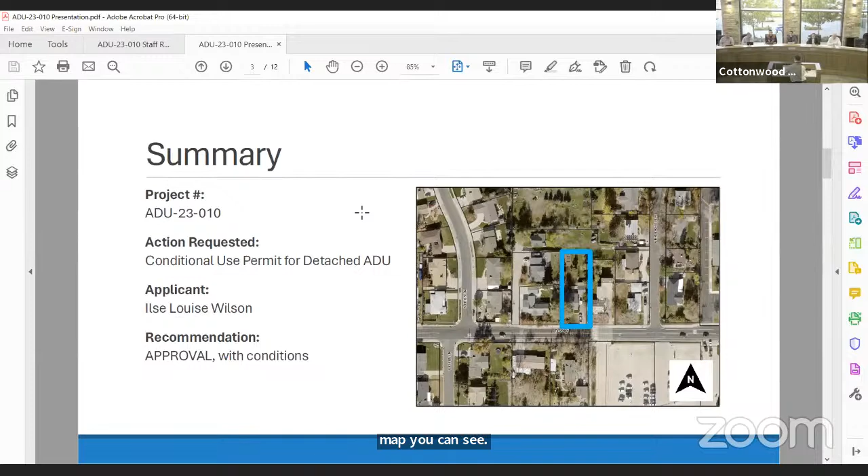The property owner is Ilse Wilson. She's in the audience today. It's an R-1-8 single family zone, so detached ADUs are again a conditional use in this zone. The acreage of the property is pretty large for the zone, it's 0.30 acres, so almost a third of an acre. On the map, you can see there that it's a pretty long parcel. It extends pretty deep from the road.

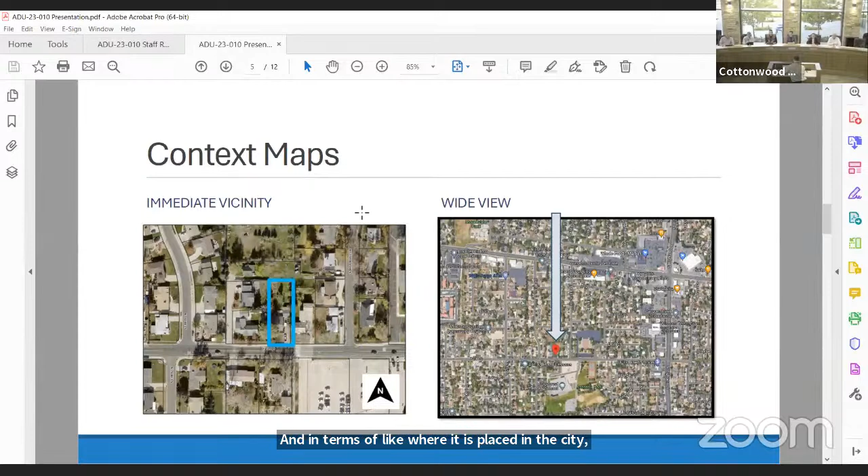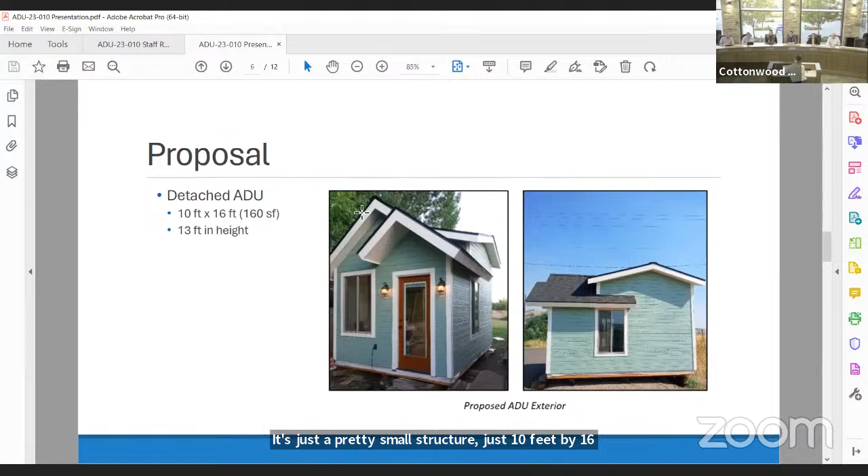So again, the proposal is a detached ADU. It's just a pretty small structure, just 10 feet by 16 feet, 160 square feet. And it would be 13 feet in height, which is much lower than the limit. The location that the applicant is proposing is in the rear yard, which is the requirement. The setbacks for detached ADUs are the same as primary dwellings in their zone.

The applicant shows on the site plan here, I'm not sure if you can see it, the text is kind of small, but the applicant shows that the ADU would be located 20 feet from the rear property line and 8 feet from the side property line on the closest side. So that meets the requirement there. And it's kind of covered by a tree in the satellite picture here, but the applicant has 2 parking spaces in the front driveway that they intend to use for the 2 parking space requirement for detached ADUs. So they've met that requirement as well.

We didn't receive any public comments by noon today, and I haven't seen any email or anything. I'm not sure if anyone's in the audience to speak to the project, but we don't have anything.

And then I just had a few findings that I wanted to copy over from the staff report. I won't go through all of them in depth, but we found it to be compliant with chapter 19.75 accessory dwelling units, our zoning ordinance that addresses ADUs, and 19.84 conditional uses. And they'd be required to continually meet those provisions with this permit.

We're holding the public hearing. We've given public notice 10 days in advance, and the property owner has landscaping and fencing to mitigate the visual impact of the parking areas and the ADU entrances to adjoining property owners.

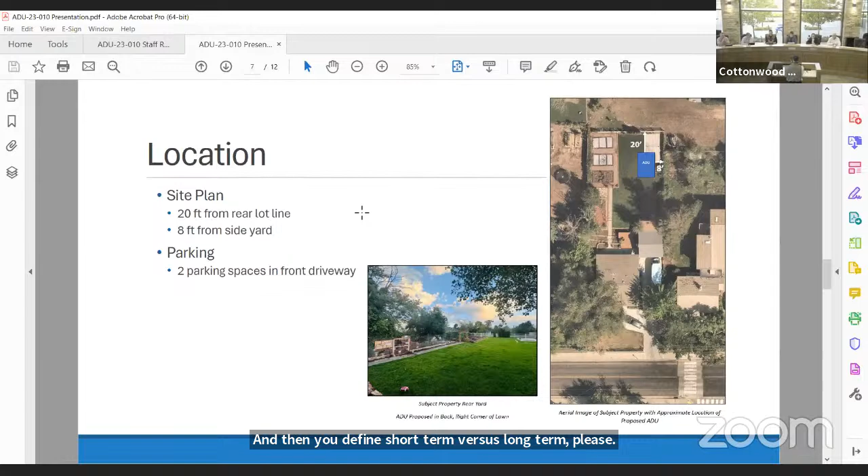Other questions? Okay, thank you. Thank you.

Does the applicant have any desire to share anything with the commission?

Okay, time for deliberation. What are your thoughts?

Excuse me, let's open this for public comment. Thank you for that. Do you have anyone that's here to make a public comment on item 3.2?

Please, if you can tell us your name, you'll have 3 minutes. My name is Catherine Burns. My husband is Kendall Brady, who's the owner of record of the property right behind her house. And she's been in conversation with him and we have no problem with this going forward. I just wanted to make that note. Thank you very much, that is extremely helpful.

Am I allowed to ask questions too? No, but you can state a question. We may not choose to answer it.

Yeah, I'm Kevin Chappie, I live just to the west of the property there. And so a couple things that, I guess I don't know the ordinances and the zoning, but it seems if you're in a single family zoned area that you could create a rental space that someone else has to potentially police to see if they're doing it properly. I don't know, that doesn't make sense to me, really. And that sort of puts it on somebody else that shouldn't be bothered with that, really, in terms of whether it's short term, long term, or whatever.

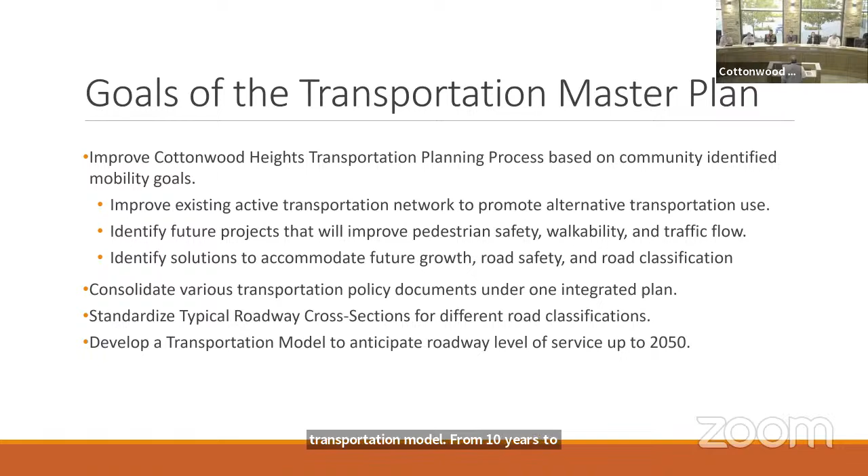We're going to go through three of the results of this master plan: first, the roadway cross sections; second, the recommended pedestrian improvements; and third, the recommended roadway improvements.

For the cross sections, there are four different groups in the city: local roads, urban collectors, urban arterials, and urban core arterials. What this master plan set out to do was standardize the cross section for each of those classifications.

What is in a cross section? You have all of the road width, you have your sidewalk, park strip, curb and gutter, and bike lanes or pedestrian facilities. Just a quick rundown, you have the local road width of 56 feet.

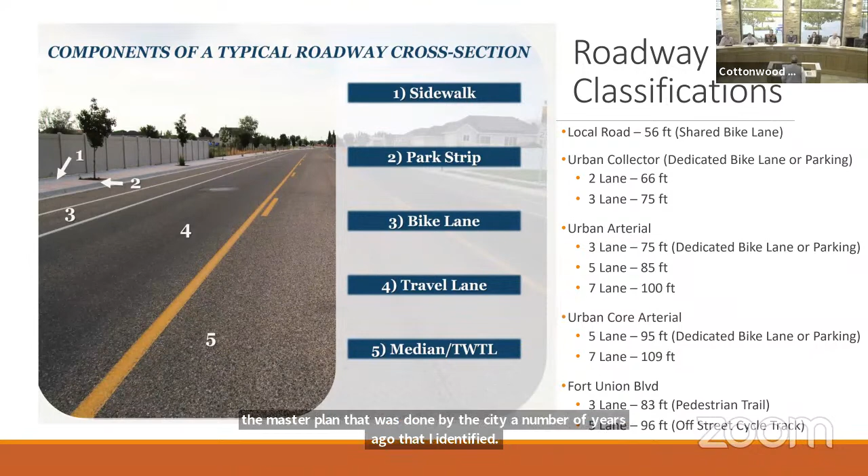One thing to note is that Fort Union Boulevard had its own designated cross section, and that was a result of the master plan done by the city a number of years ago that identified specific facilities on Fort Union Boulevard. This is the map of the existing roadway network, and you can see Fort Union Boulevard identified in green as an urban core arterial.

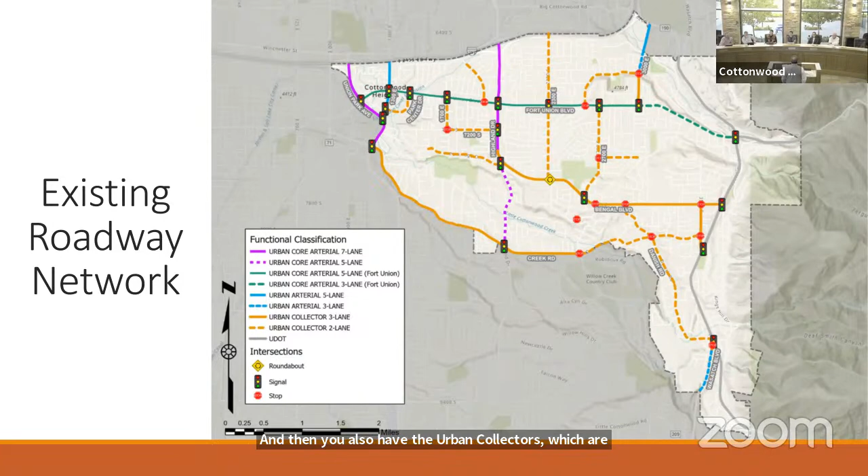You also have the urban collectors, identified in orange, which are typically 2300 East, 2700 East, Creek Road, and for urban arterials, you have 1300 East and 30th East.

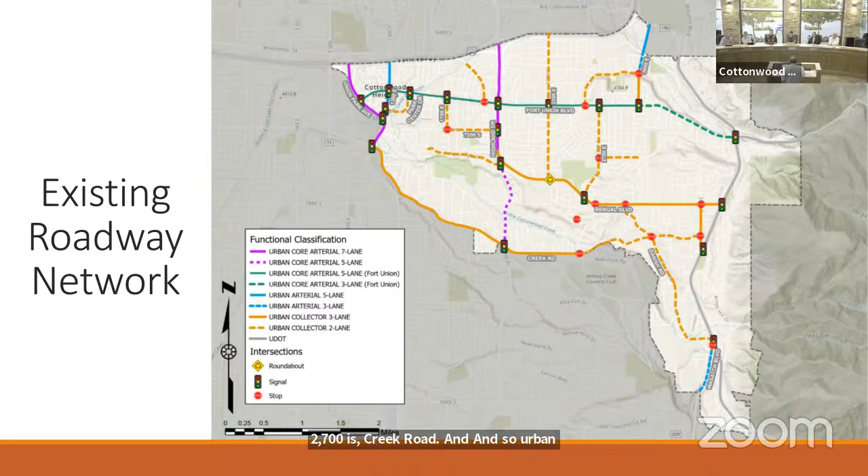We'll just quickly look through these. These are the cross sections shown on the master plan. One thing to note is that we made every attempt to include pedestrian facilities in these cross sections.

This is the urban collector cross section. It's 2-lane and 3-lane. The 2-lane urban collector is a 66-foot cross section, and the three-lane urban collector is a 75-foot cross-section. One of them is shown with parking, and the other is shown with a bike lane.

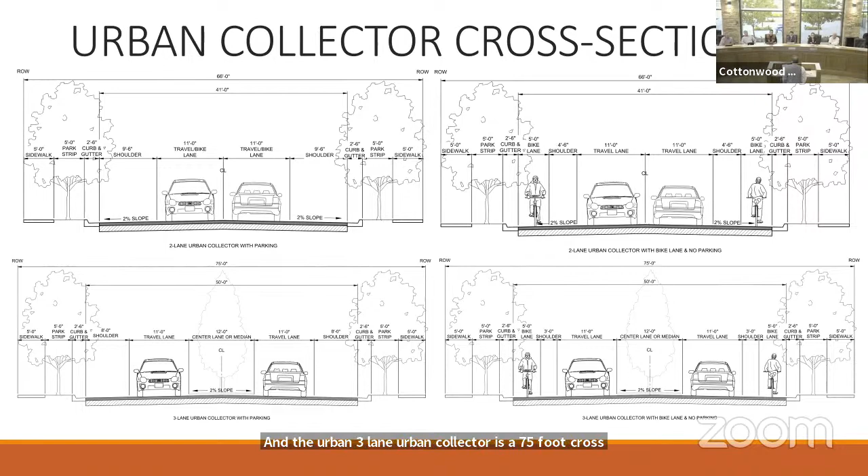Three-lane urban arterial has a cross-section of also 75 feet, and it also shows either a bike lane or an 8-foot shoulder along with the travel lanes.

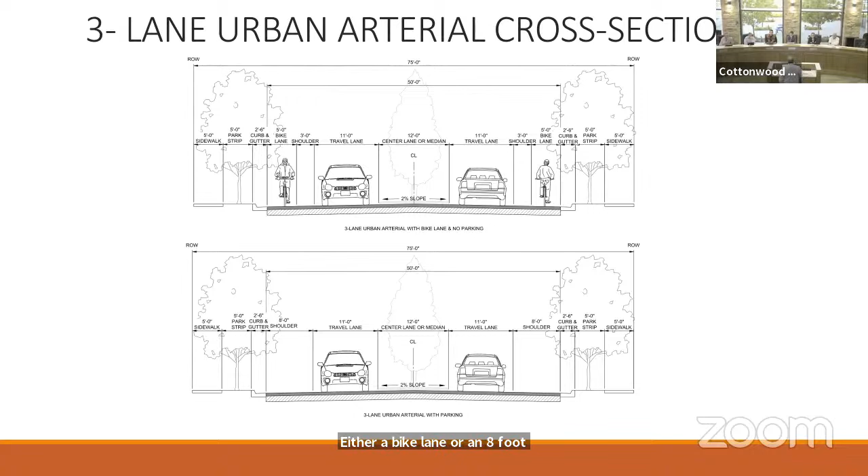And finally, you have Fort Union Boulevard, which is showing a 3-lane urban core arterial and a 5-lane urban core arterial. On the 3-lane urban arterial, it's showing a 20-foot section for a future pedestrian trail, located between Wasatch Boulevard and 30th East. The urban core arterial 5-lane is west of 30th East all the way down to 1300 East.

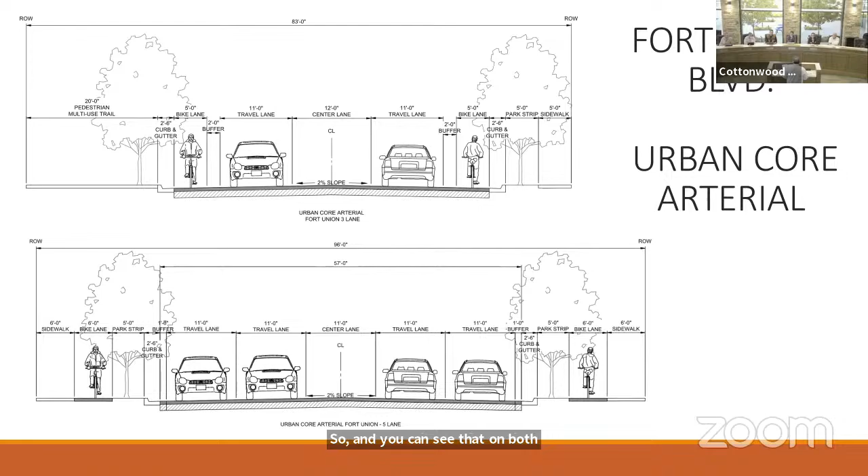It's showing what's called a cycle track, where you have a grade separated bike path and a sidewalk that's separated from the roadway. You can see that on both sides of the road, a 6-foot bike lane and a 6-foot sidewalk on Fort Union Boulevard. The second part of this presentation is regarding the active transportation facilities.

There are 3 types of active transportation facilities identified in the various engineering manuals. Level 1 is a facility that is grade separated from the roadway, so it has a physical barrier that separates the trail or pedestrian facility from the roadway. So you have a curb and gutter, something moving the facility off the road with a physical barrier.

That would be a cycle track or pedestrian trail. A level 2 is a facility that's located on the roadway, but is designated for pedestrian facilities exclusively. That would be a buffered bike lane. And level 3 is a facility that's shared between bicyclists and vehicles, and that would be a shared bike lane.

The first thing you're looking at here is the existing active transportation backbone in Cottonwood Heights. You can see there's buffered bike lanes on Bengal Boulevard. You can see the big Cottonwood Canyon Trail identified in orange. And there are a number of shared roadways and buffered bike lanes. So this is what's existing currently in the city.

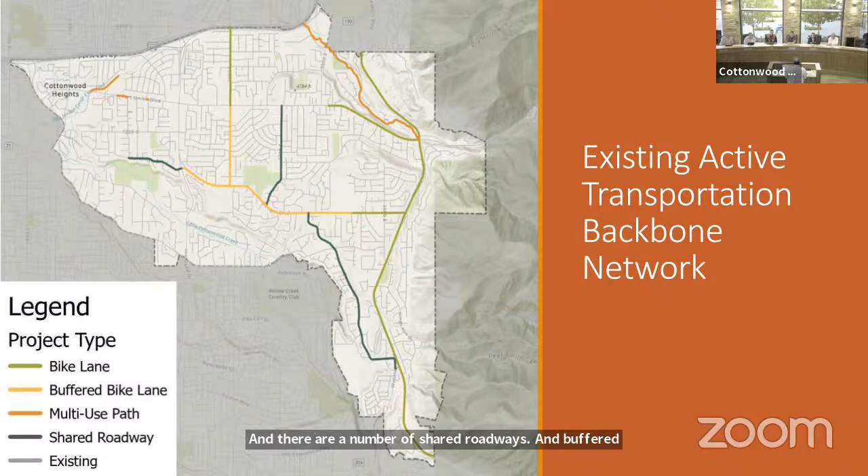So the third part is the model that was used to develop this Transportation Master Plan. This model is based off of Wasatch Front Regional Council's TAZ model, which is a model developed for the entire Salt Lake County region. It includes the employment and residential populations for different areas.

What this model is, it's a high-level model. This is not a site-specific model. It's not detailed, like it doesn't model each car, which would be called a synchro model. This is more based off of daily volume, daily traffic. The Synchro or VISSIM model is not included in this study. So this is more of a 10,000-foot analysis of the entire city.

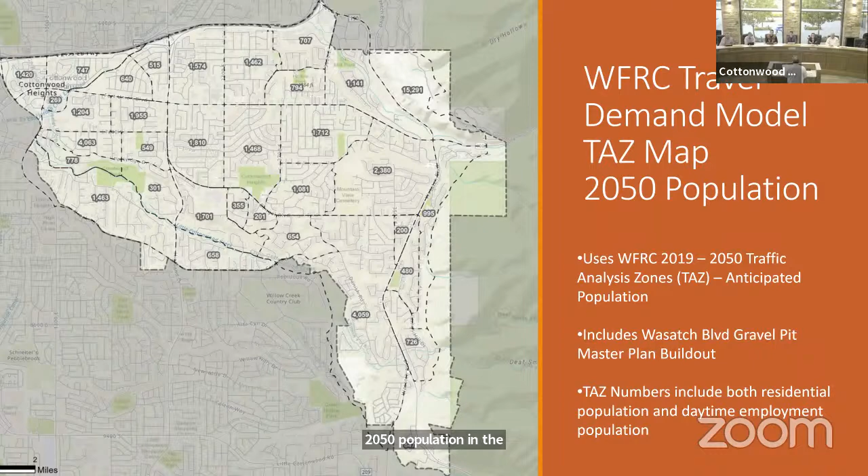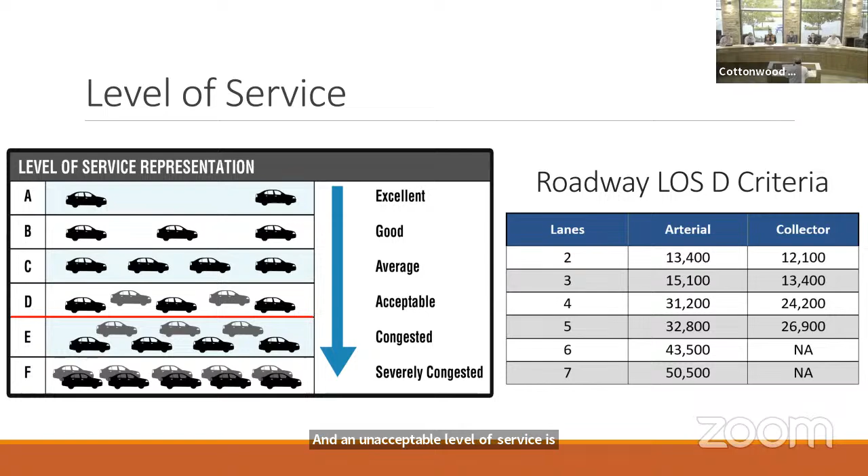So level of service, this model and its recommendations are based off of a level of service where when you get below a D, you're reaching the threshold of unacceptable. On the right, you can see the volume they use to establish that level of service of D, which comes from AASHTO, the engineering publication. A level of service measures the delay on the road based off of the total number of cars in a day, and an unacceptable level of service is typically below a D, so an E or an F is where you start seeing the congestion.

The original plan in 2019 did not include the gravel pit, but they did include the gravel pit in this one.

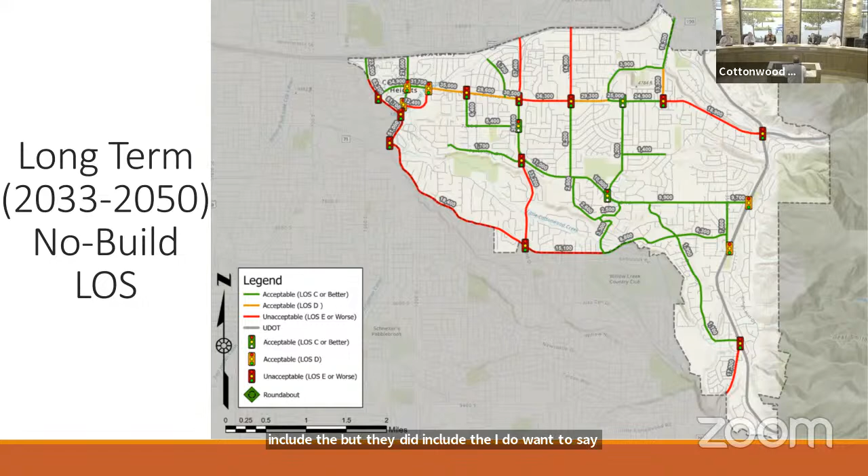I do want to say, if you look at the recommendations for the roadway, what they found was, going back to the impact fee analysis, that future development in the city did not have a large enough impact to warrant an impact fee. The percentage was very low. Typically, when you see impact fees, it's because you have to build a road for a new development.

Cottonwood Heights being a built-out city didn't see that type of pressure being put on the roadway. I guess most of the pressure is coming from the existing population, and also the regional traffic that comes through our city.

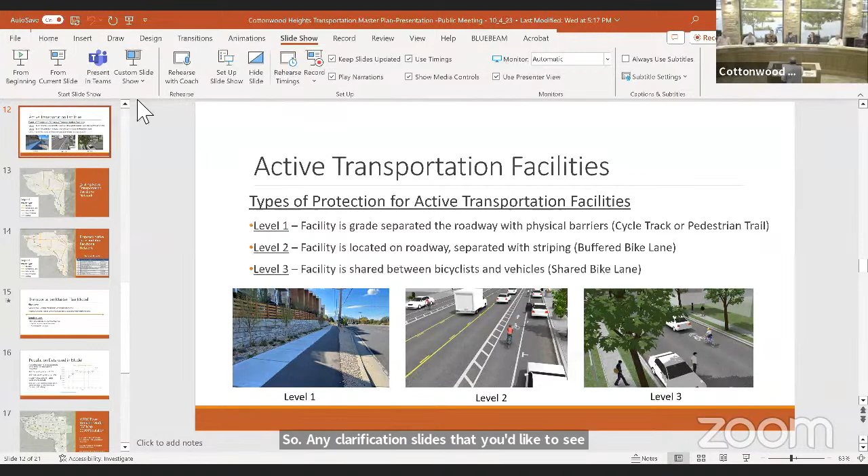Level of service can be controversial at times because it's focused on traffic flow, and there's definitely an element in our city that is focused on safe streets and wants the speeds to go down and down, wanting us to put way less emphasis on moving cars. Adam's trying to navigate that, between moving people walking, moving people on bikes, and moving people in cars, and trying to balance that with the future.

I'll just add, from a planning standpoint, level of service and traffic flow doesn't necessarily correspond with speed. Design is a big deal, and we touch on it here, but design can mitigate speed while still maintaining a good level of service for cars to move efficiently, but also safely and at a safer speed than what we see. So you can have all these things be compatible.

The level of service is an important metric when you're looking at roads in the city, even if your emphasis is on safety and adding active transportation, trails, and things like that. So all these things kind of live and work together. The important element for the planning department working with engineering on this is to make sure all of our plans are speaking the same language, because they're all achieving slightly different things.

I do think the clarification is helpful, that level of service doesn't necessarily mean widen the road and make it faster. We can still achieve our goals of making roads safer and slower while maintaining an acceptable level of service. The operational projects are not recommending widening the road; they would focus on pedestrian safety and improving traffic flow at the same time, whether that included protected crosswalks or forms of traffic calming, all worked out in design. This is just a high-level look at all the different roads in the city and their existing capacity.

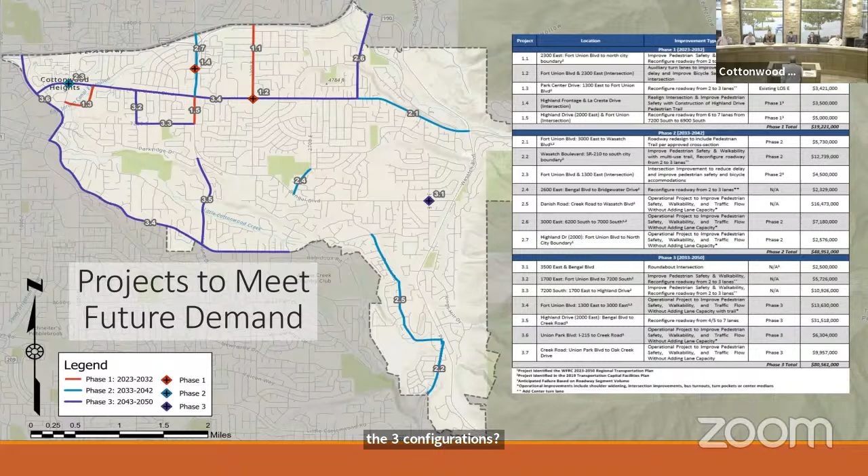Chairman Mills, can we go back to the slide with the three configurations? I had a question on that I wanted to touch on. There were a couple of those configuration cross sections, I think one or two back from that. Is it the one with the 1, 2, and 3?

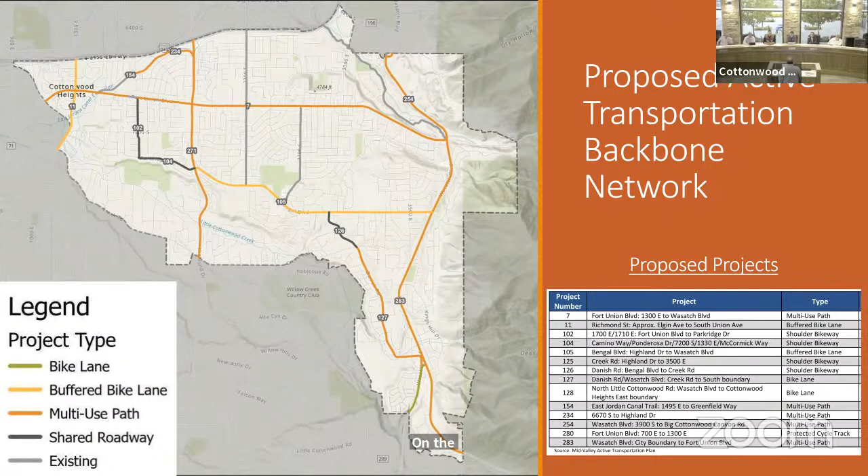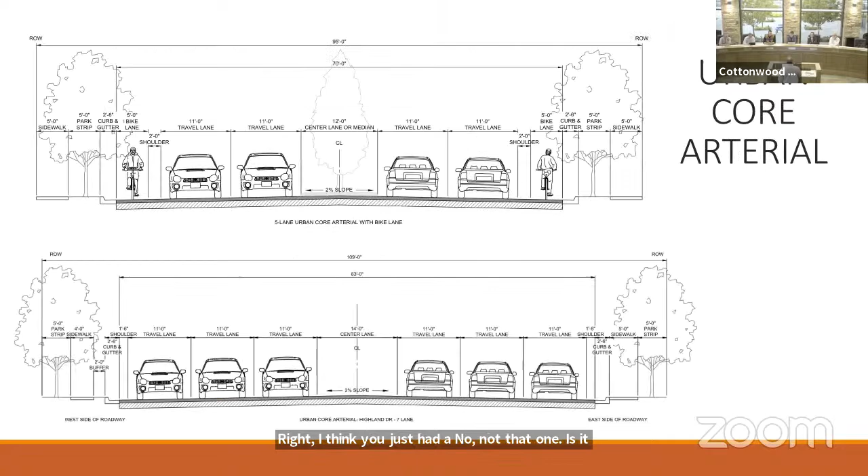Wait, I think you just hit it. No, not that one, it's the actual streetscapes. Oh okay, yes, yeah that's it.

For level 2, I don't know if this has been considered, but I've seen this in other cities, Copenhagen in Denmark for instance, where they use the cars as a buffer by swapping the bike and car parking, so the cars become a physical buffer to the bicycles. This presents less interference with mixed modality, because for a car to park here you'd have to cross a bike lane, versus if the car is a physical barrier, the bikes are on the inside. I didn't know if that was a considered configuration.

The picture for level 2 comes from NACTO, and they do have that same configuration with parking on the inside of the road. I believe that would be more of a level 1, because they usually include some sort of landscape buffer and curb as well, which is what the picture on level 1 shows in front of the Views 23, where the trail is off the roadway. So yes, that is shown in NACTO, and it's something we would consider in design.

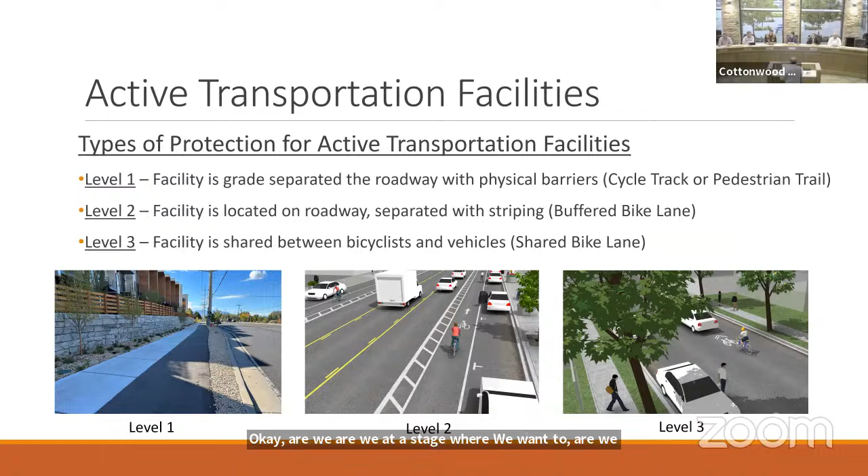Are we at a stage where we're looking for a motion or a recommendation to be made? Yeah, that'd be great. We do have a couple public comments here too, so just as a reminder, that's fantastic. But yeah, it's ready whenever the commission's ready. As a reminder, this is a master plan, it's legislative. So this is a recommendation on to city council, and then we pick it up and do the same thing with city council.

Okay, let's go to public comment. So we have a comment card from Audrey Pines. Thank you for waiting so patiently, Audrey.

We got some comments from Audrey that included other things related to this. So I'm going to say, in lieu of the fact that you covered other things in your comments, typically I don't believe that you comment twice on something. I'm going to just say that the stuff you sent to us was more general public comment, and that this is more specific to the transportation master plan. Is that okay? Yeah. I didn't actually realize we were going to talk about this specifically.

So actually, the first question I have is towards Mike Johnson, but I've been slogging through this thing, which I appreciate all your work, you guys, if you're actually trying to read through this thing. And my council person, Ellen Birrell, got us involved with it with the grants. And, you know, there's a lot of social engineering in these, and I'm not sure how much we're attached to some of the crazy things that are in this, which has nothing to do with exactly what we're talking about now, but it's under the big transportation bill, like cameras and shut off switches and crazy stuff. So this is a conversation that I think I would like more information on, how attached we are to losing our sovereignty of our city for some of these things.